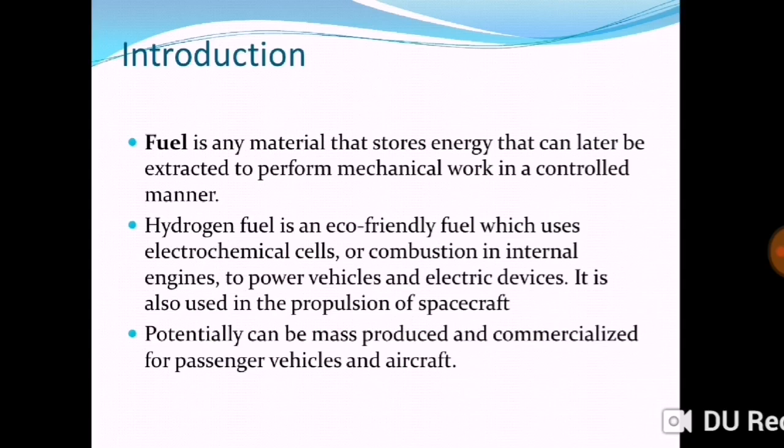Status of hydrogen today. Although hydrogen is the most abundant element in the universe, it does not naturally exist in its elemental form on Earth. Pure hydrogen must be produced from other hydrogen containing compounds such as fossil fuels, biomass or water. Currently the leading technology for producing hydrogen in large quantities is steam reforming of methane gas. Engines that burn pure hydrogen produce almost no pollution.

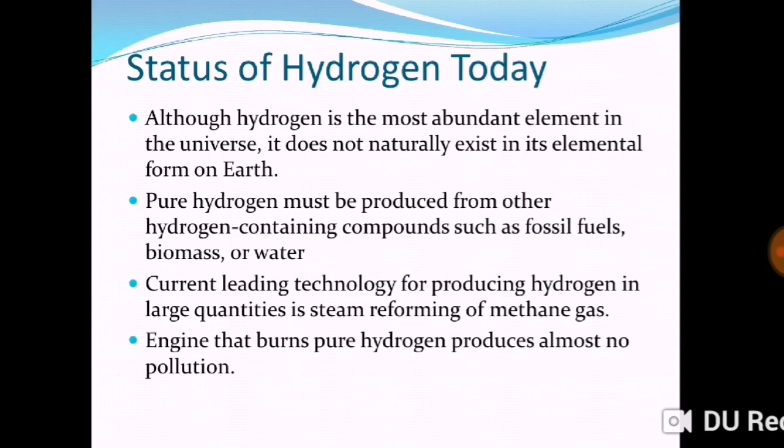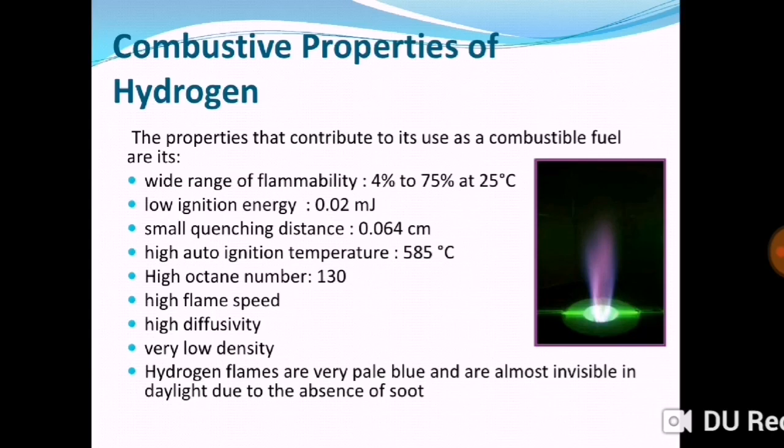Combustive property of hydrogen. The properties that contribute to its use as a combustible fuel are its wide range of flammability, low ignition energy, small quenching distance, high auto ignition temperature, high octane number of 130, high flame speed, high diffusivity, very low density, and hydrogen flames are very pale blue and almost invisible in daylight due to the absence of soot.

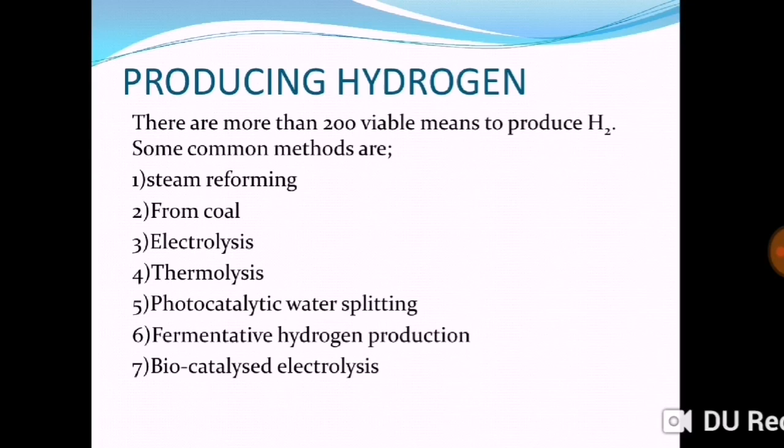Now the production of hydrogen. There are more than 200 viable means to produce hydrogen. Some common methods are steam reforming, from coal, electrolysis, thermolysis, photocatalytic water splitting, fermentative hydrogen production, biocatalyzed electrolysis. So this is the sustainable path of hydrogen.

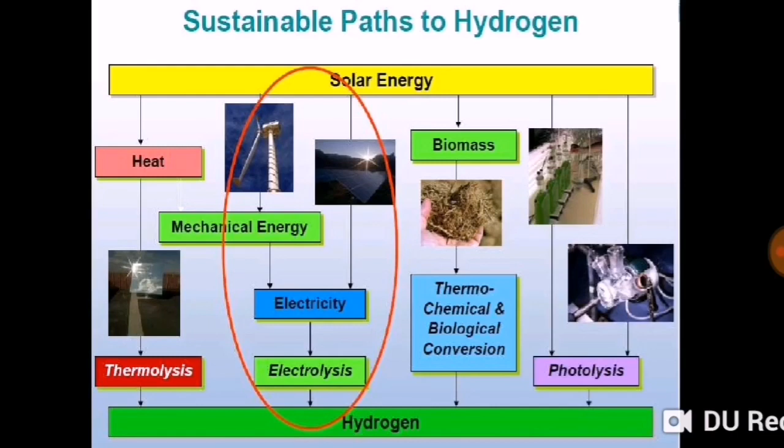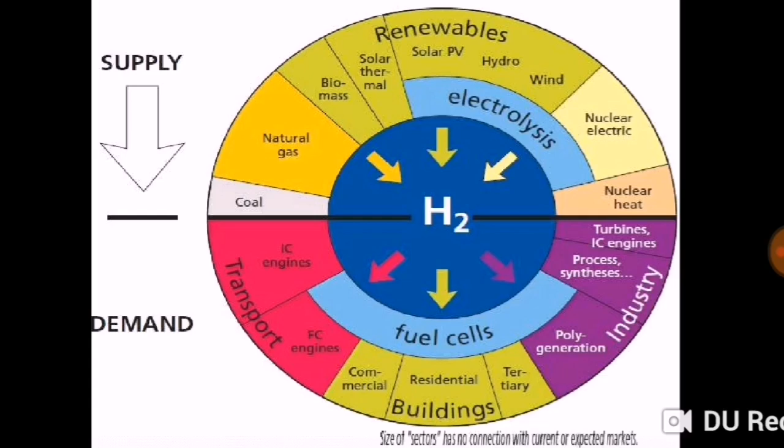So it's a circular chart that gives the supply to demand. The hydrogen which is produced from many renewable sources and which is used for transport, buildings and industries, is shown by the circular chart.

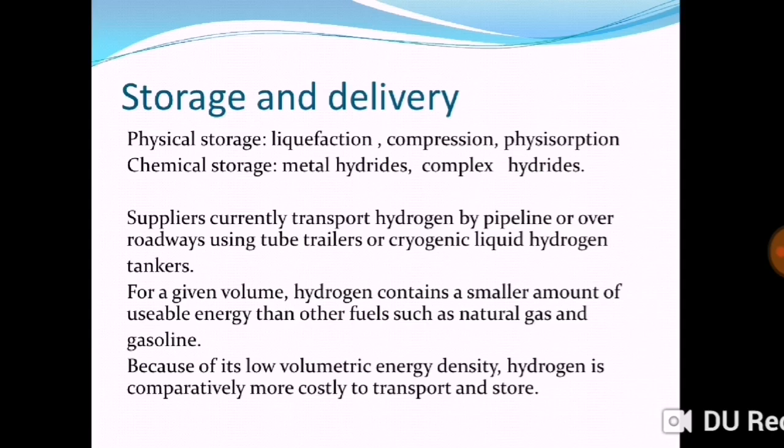Suppliers currently transport hydrogen by pipeline or over roadways using tube trailers or cryogenic liquid hydrogen tankers. For a given volume, hydrogen contains a smaller amount of usable energy than other fuels such as natural gas and gasoline. Because of its low volumetric energy density, hydrogen is comparatively more costly to transport and store.

So now here we see the YouTube video of hydrogen by using this YouTube link. After watching this video, your idea about hydrogen fuel will become crystal clear.

Hydrogen. Hydrogen is the first element of the periodic table consisting of one proton. It is the simplest and most abundant element in the universe. Hydrogen does not occur naturally. It is always found in combination with other elements. Water, for example, is a combination of hydrogen and oxygen. Hydrogen is also found in many organic compounds, notably the hydrocarbons that make up fuels such as gasoline, natural gas, methanol, and propane. The tricky part of hydrogen as a fuel source is getting it in its pure form.

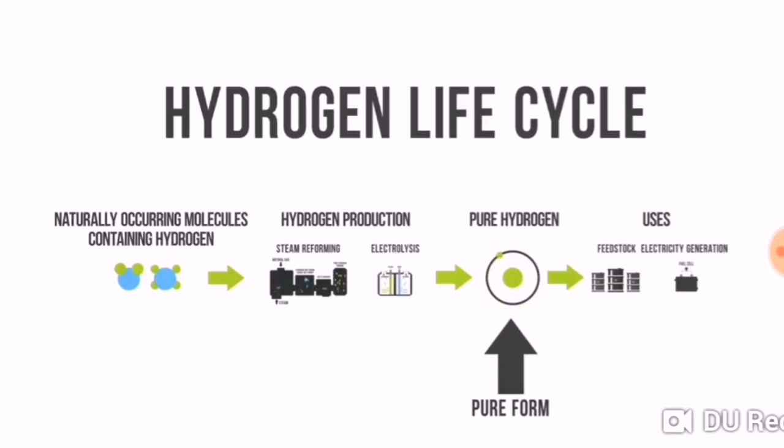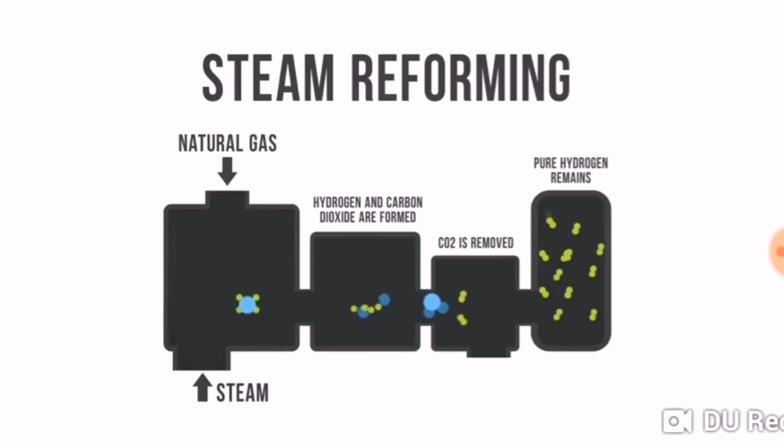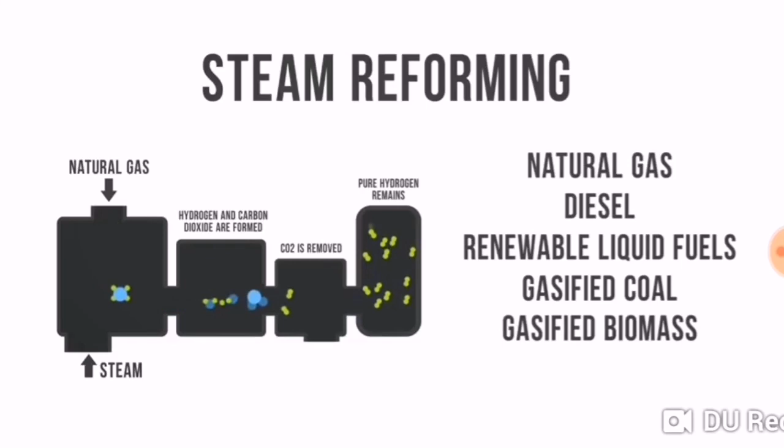Hydrogen is primarily produced using two methods: steam reforming and electrolysis, also known as water splitting. Steam reforming is a high-temperature process in which steam reacts with a hydrocarbon fuel to produce hydrogen. Many hydrocarbon fuels can be reformed to produce hydrogen, including natural gas, diesel, renewable liquid fuels, gasified coal, or gasified biomass. Today, about 95% of all hydrogen is produced from steam reforming of natural gas.

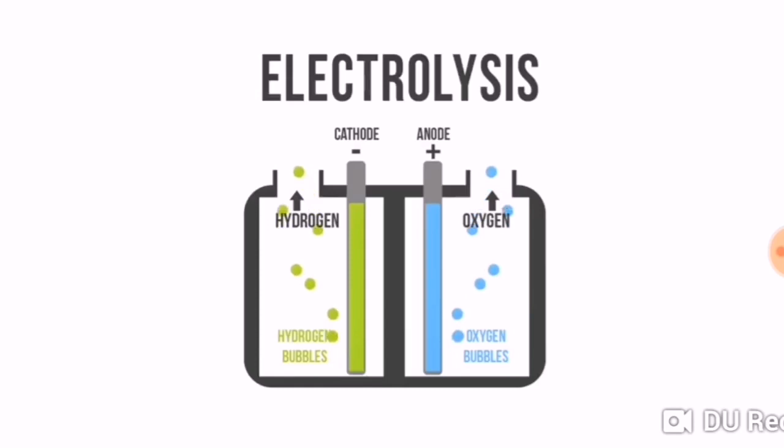Electrolysis is a process that splits water into its basic elements, hydrogen and oxygen, using an electric current. The electricity used in the process may come from hydrocarbons or renewables. Hydrogen is an energy carrier, not an energy source. It is an efficient way to store and transport energy. For this reason, hydrogen has a unique and oftentimes little understood role in the global energy system.

Some may not know that hydrogen has important applications in the oil and gas industry. Hydrogen is used to process crude oil into refined fuels such as gasoline and diesel, and for removing contaminants such as sulfur from these fuels. Hydrogen is also used in a range of other industries, including chemical production, metal refining, food processing, and electronics manufacturing.

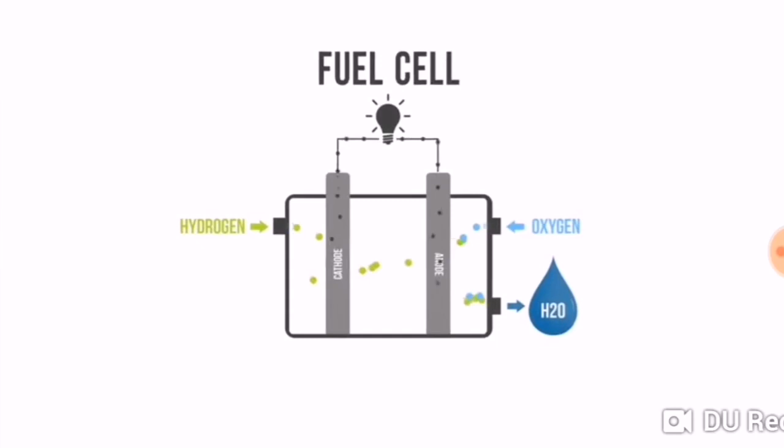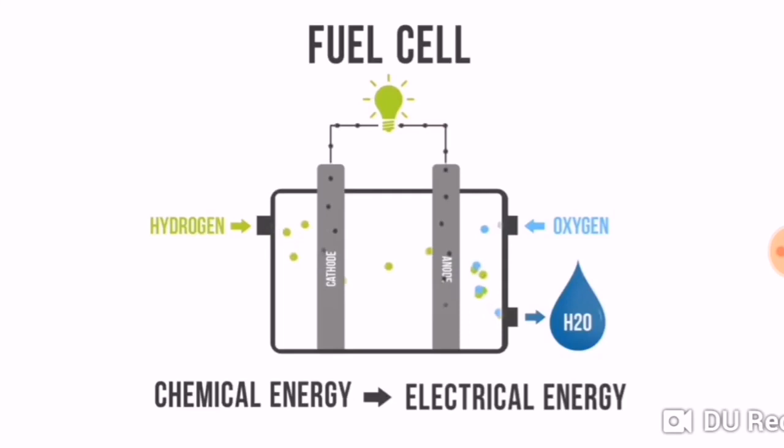Hydrogen can also be used for electricity production through a fuel cell. A fuel cell is an electrochemical cell which produces electricity by converting chemical energy into electrical energy. When hydrogen is combined with oxygen in a fuel cell, it produces heat and electricity with only water vapor as a byproduct. Fuel cells are unique in terms of the variety of their potential applications.

They can provide energy for systems as large as a utility power station and as small as a laptop computer. Fuel cells can provide electric motor transportation for vehicles and provide power in stationary and portable power applications. Fuel cells have no emissions at the point of operation. The most significant advantage of hydrogen is that it is an efficient energy carrier.

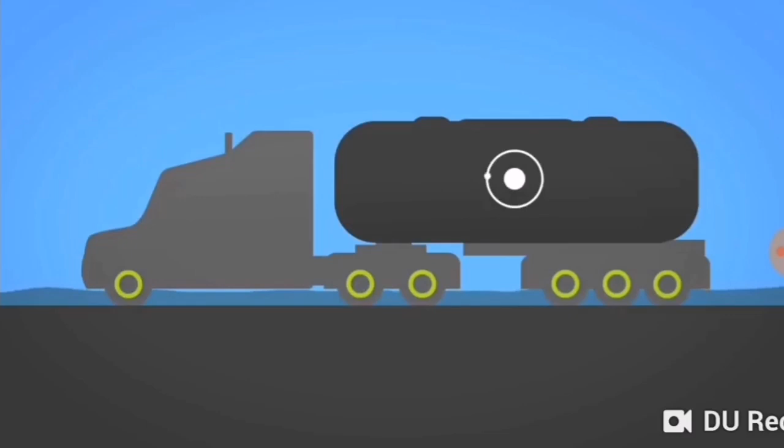However, the ultimate challenge with hydrogen is getting it in its pure form. While some of its applications appear attractive for environmental reasons, deriving hydrogen requires energy that can result in greenhouse gas emissions and air pollutants that lessen the overall environmental benefits of the technology. In addition, cost and practicality, such as lack of support infrastructure and storage of the highly explosive element, are major concerns. That's hydrogen.

Now here we see the uses of hydrogen as a fuel. The first use is stationary power generation. It's also used in the residential sector. Hydrogen as a fuel is used for transportation with no pollution, and it is also used for portable power.

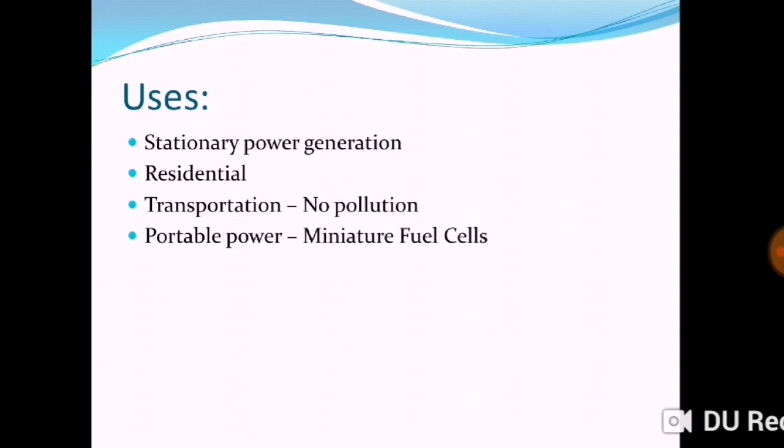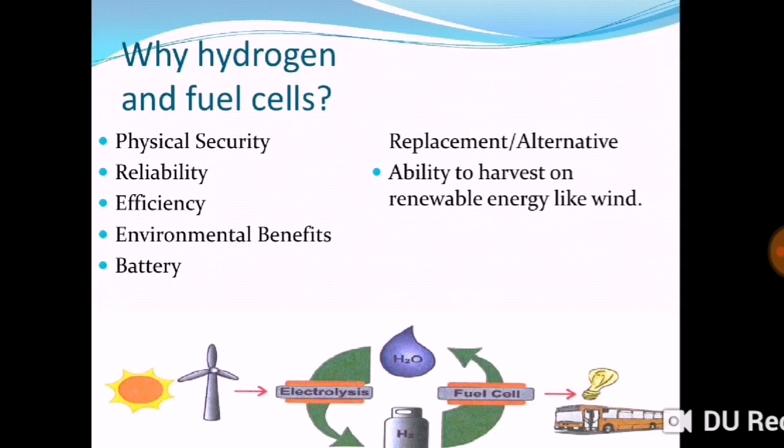Why hydrogen and fuel cells? Because of physical security, reliability, efficiency, environmental benefits, battery replacement and alternatives, the ability to harvest renewable energy like wind, no dependence on foreign oil, and zero to near zero levels of harmful emissions.

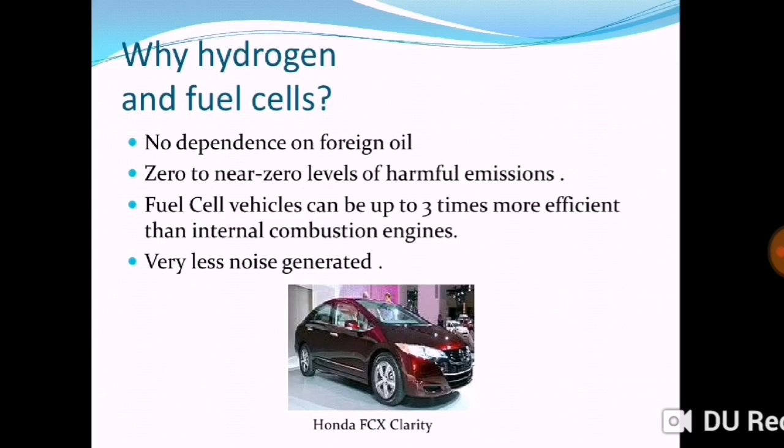Fuel cell vehicles can be up to three times more efficient than internal combustion engines. And finally, very little noise is generated. This is why we need hydrogen as a future fuel.

So, the safety implications. Colorless and odorless, extremely reactive with oxygen and other oxidizers, low ignition energy, high flame temperature, invisible flame in daylight conditions, negative Joule-Thomson coefficient, so leaking gas warms and may spontaneously ignite,

small molecular size promotes leaks and diffusion, very wide flammability limits in air mixtures, and it can diffuse into or react with certain metals, embrittling them. The cryogenic liquid at 20 Kelvin is even colder than frozen nitrogen, oxygen, or argon.

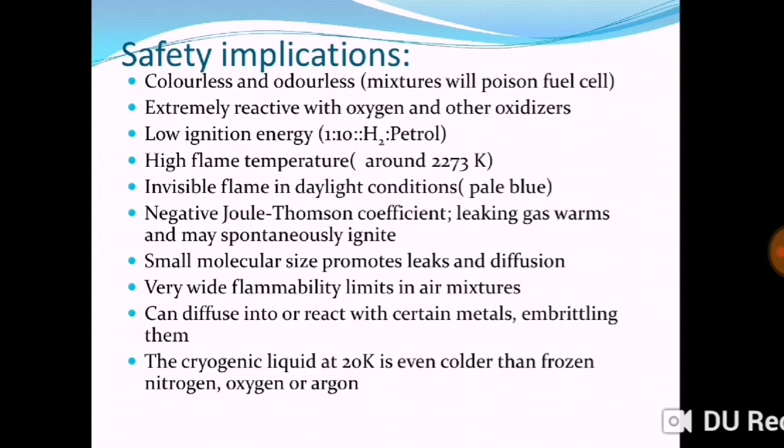Finally, the challenges of hydrogen as a fuel. Infrastructure: refueling, large scale manufacturing processes and support infrastructures such as trained personnel are not yet available for fuel cell systems.

Hydrogen has to be stored on board vehicles, at hydrogen production sites, refueling stations and stationary power sites, which requires several precautions. The size and weight of current fuel cell systems must be reduced to attain market acceptance, especially with automobiles.

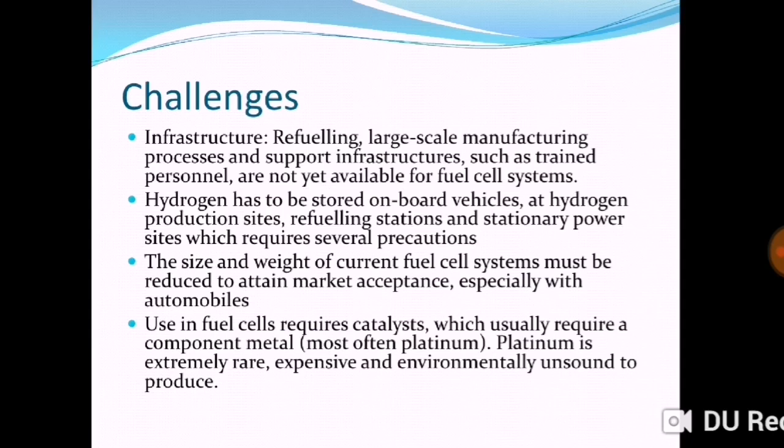Use in fuel cells requires a catalyst, which usually requires a precious metal. Platinum is extremely rare, expensive and environmentally unsound to produce.